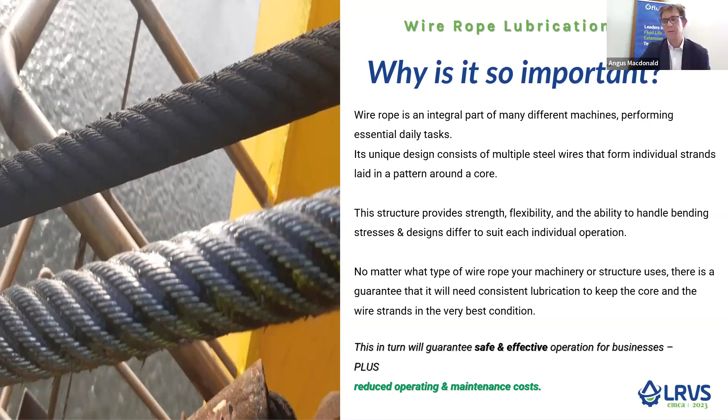So why should we be looking at lubricating wire rope? Well, compared to presentations on big key applications like turbines, compressors, hydraulic systems, that kind of thing - lubrication can raise wire rope lifetimes by up to 300%, improve safety for operators, and really importantly, increase the availability of equipment, so we're reducing downtime.

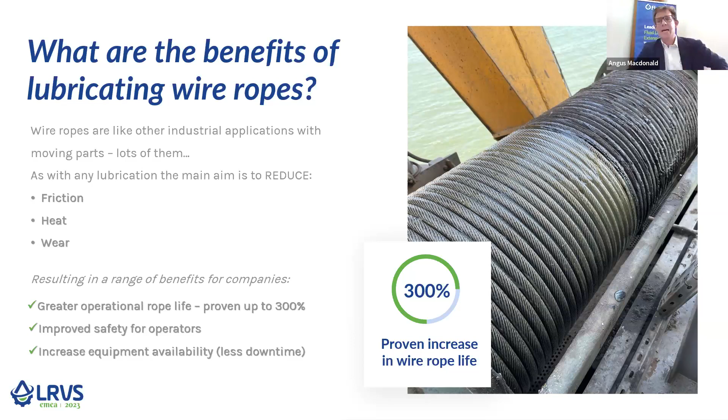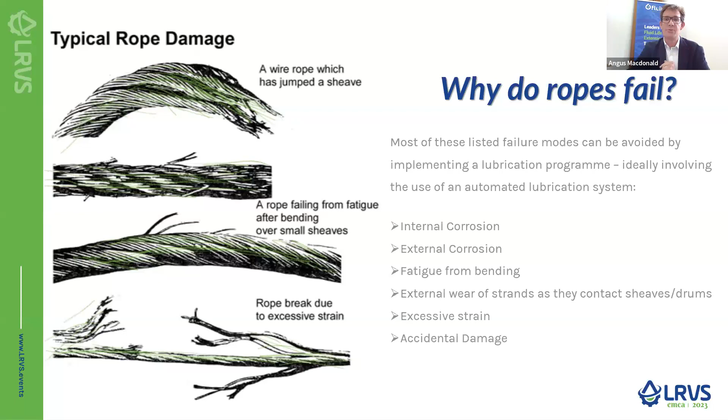So why do ropes fail in the field? There's a list of these failure modes. Most of these, not all, can be avoided by implementing a lubrication program, ideally involving the use of an automated lubrication system. These include internal corrosion - it's incredible how much moisture and water makes its way inside ropes. External corrosion, obviously a lot of the rope is exposed to general weather conditions. Fatigue from bending. There's also external wear of strands as they contact sheaves and drums on the particular application. Excessive strain, and unfortunately there's also accidental damage, which can't always be controlled, and that depends on the industry. But most of these failure modes can be controlled or significantly reduced by quality lubrication.

So some lubrication is understandably better than none at all. When I visit customers around the world, it still amazes me how many companies aren't actually implementing any sort of lubrication on their wire ropes. However, the majority, I'd say, are still manually lubricating ropes in multiple industries, and there are a few issues with that. Firstly, it's extremely labor intensive. It's a slow process. It will mean there's increased expensive equipment downtime because those ropes can't be working normally, so that's an added high cost.

It's numerous workers being involved in a relatively non-value adding activity. Importantly, it's extremely messy. You can imagine, we've got a couple of examples there, particularly on the right-hand side, these huge ropes.

The extra mess leads to equipment downtime because cleaning is needed for the surrounding area. There's a lot of wastage of lubricant. A lot of the lubricant doesn't actually make its way onto the rope, but onto the floor, into the general environment. And it tends to also involve an excessive use of rags, gloves, overalls, that kind of thing.

Unfortunately, manual lubrication tends to be fairly ineffective. As you can see from the picture on the right-hand side, when a lubricant's being applied by gloves, brushes, or maybe a spray, you're typically only going to be coating the outside rope strands. So the core of the rope will not be receiving any lubrication. You're not going to be getting any real penetration, particularly if you're just slapping grease on the outside of that rope. Hence, corrosion and wear is then possible.

Also, there's no water displacement from the rope internals, so the water will remain in there. And as I've just mentioned, that internal corrosion is going to build up, which can lead to rope failure fairly rapidly.

Inconsistent application will lead to ineffective lubrication. So yes, the lubrication, some is better than none at all, but I hope you can see here that the manual side of things isn't that effective.

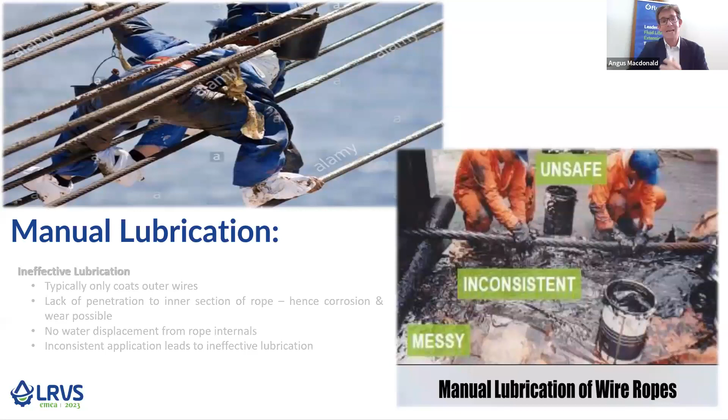And finally, with this business, if they're handling rope, workers will be coming into contact with it while wearing gloves or whatever. It's not a safe environment. Very often, as you've seen from some of the previous application photos, they're generally working at heights to do the lubrication, which again leads to dangers.

And I've already mentioned there can be environmental contamination with excess lube dripping off the ropes, entering maybe waterways or sensitive areas. And again, it's a slow process. It means the equipment's not working, which means you've got downtime, adding to the costs for the client. And I've mentioned already that there's numerous workers being utilized on a non-value added activity.

I was with a port facility in the UK a few weeks ago, and they said they still manually lubricate the wire ropes. They've got a fleet of 80 straddle carriers, and the maintenance team said to make sure they're completely clean before they can be used again, and that takes hours and hours. So it just shows that even in a very modern port facility, there's still a lot of manual lubrication being used.

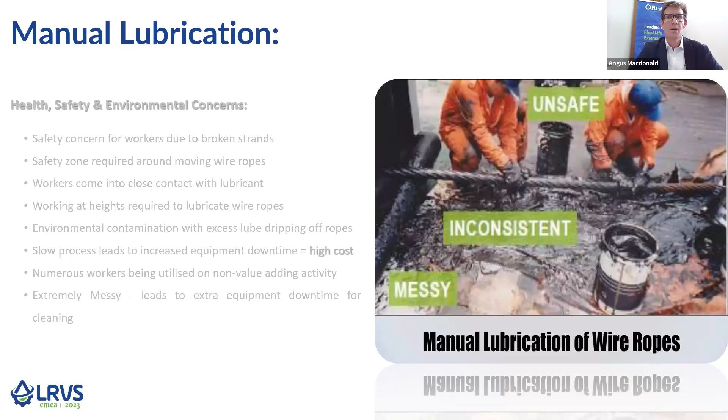In that case, what is the alternative? What these days should be the best practice solution for lubricating wire ropes?

As well as just lubricating ropes now, it's also involving the cleaning of ropes - the removal of contaminants prior to the actual lubrication of the ropes, ensuring an even more effective penetration into the rope.

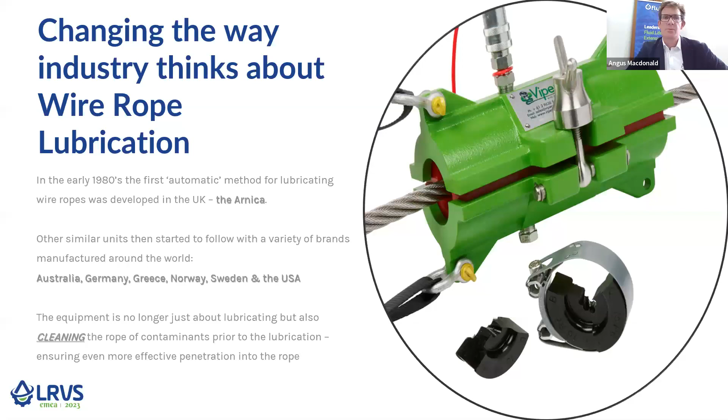So when clients choose an automatic wire rope lubrication system, why are they doing it? Well, number one, they're generally interested in increasing the life of their wire rope. I've already mentioned that it's been proven over the years that with really quality lubrication, you can save by up to 300%, and that's mainly down to superior corrosion and wear protection.

I've talked a lot about how timely manual lubrication is and how much time that takes. With an automatic lubrication system, it's been proven over the last few years that the amount of labor required for lubrication when using a unit can be reduced by up to 90%.

A number of the units on the market these days can achieve lubrication speeds of up to 2,000 meters an hour. And I've also mentioned downtime a couple of times already - with that kind of reduction in lubrication time, we can really have a significant reduction in expensive downtime, meaning that critical applications such as cranes can keep on working for much longer periods of time.

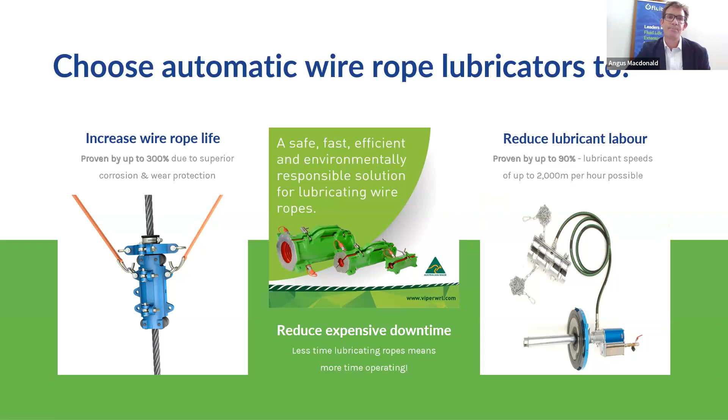So how do the wire rope lubricators actually work? They are all, as you've seen in some of those earlier photos, fairly similar in design.

The collar clamps onto the rope. Inside the collar, we have a pair of seals generally, which are designed specifically for wire rope diameters. This collar is then filled with the lubricant, which tends to be a grease, applied from a grease pump.

Inside the collar, as I mentioned, the seals are specific to particular rope diameters. The rope is pulled through the collar, and depending on the design of the seal, very often they're working to hydraulically work the grease into the rope. These kind of units are often called pressure lubricators, which is really not accurate, because when you're dealing with a rope it's not a solid structure and you can't completely seal that collar, so it's not really under pressure, but you're filling that collar.

With that specific example, with the design of the seal, as the rope travels through that collar, the seals actually hydraulically massage the grease inside that rope.

Thirdly, and more so probably in the last 5-6 years, wire rope cleaners have been developed. Again, these are very much designed specifically depending on the lay of the rope, right-hand lay or left-hand lay, and the number of strands—so you'll either have a 6-strand rope, 8-strand, or a multi-strand or armored rope.

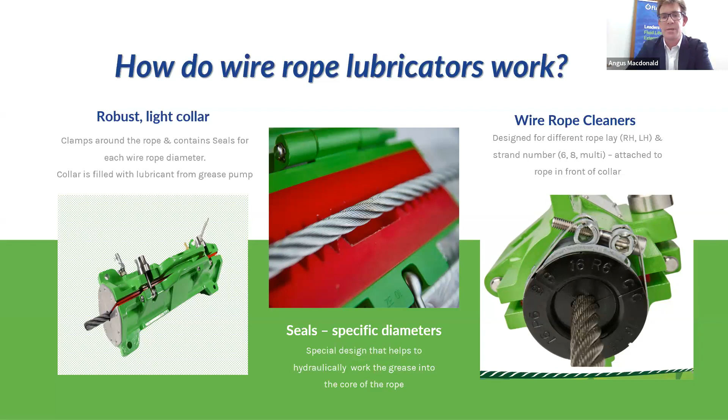I've just got a very quick video because it's easier to explain by a short video. This is actually taken from a coal loader in Indonesia, I think 5 or 6 years ago. We posted this on our LinkedIn profile earlier this year.

And the reason I've included some of these figures is just to show how interested people are in this kind of application. So, nearly 75,000 views of this particular video, over 4,000 engagements, nearly 2,000 likes, a lot of reposts, etc. So it's still incredible how many people and companies do not know that this type of lubrication method exists.

So we'll just have a quick look at this particular unit. There, the front of the collar—that's the wire rope cleaner removing a lot of the excess old lubricant from the rope. And out the other side of the collar, you can then see a really well lubricated, consistent level of lubrication on the rope.

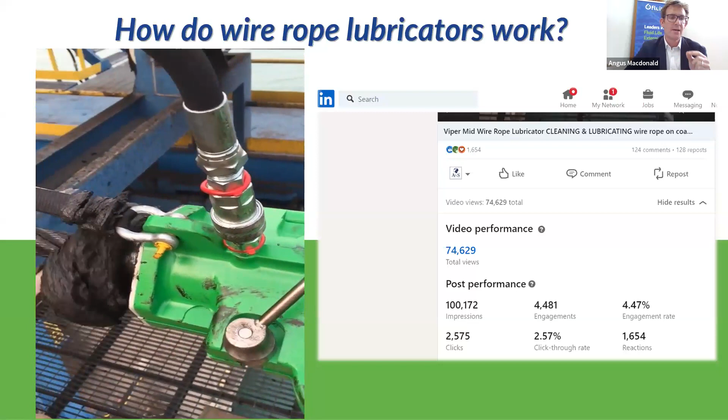You can see there's no spillage of grease from the collar—it's all going on the rope, so there's no lubricant being wasted. And in front of the collar, importantly, all the old contamination is being removed and collected, so that you're getting a really nice, clean rope going into the collar to be fitted.

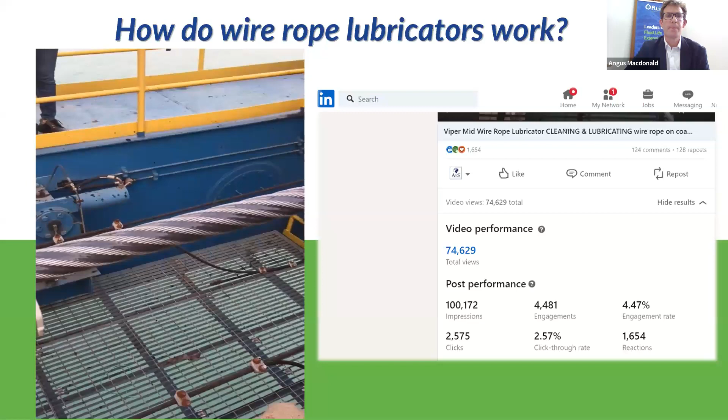So moving on again in terms of how the wire rope lubricators work, I've mentioned generally you're applying a grease, and they can vary from NLGI 00 up to maybe a non-tacky NLGI 2. A lot of customers around the world are using a 0 or 1.

A range of greases have been proven to be effectively applied using lubricators, and the choice will depend on LETs—so the load, environment, temperature, speed—and obviously the type of application. So that particular image is a 00 grease being used on a mobile crane in a mining facility. This is a number 1 lithium tacky grease being used on a winch in a shipyard.

And then finally, it is possible to apply oils. It's not quite as easy as using a grease, but that can sometimes be required depending on the application. So this is a mining winder in Canada, and depending on the type of application, sometimes an oil is required.

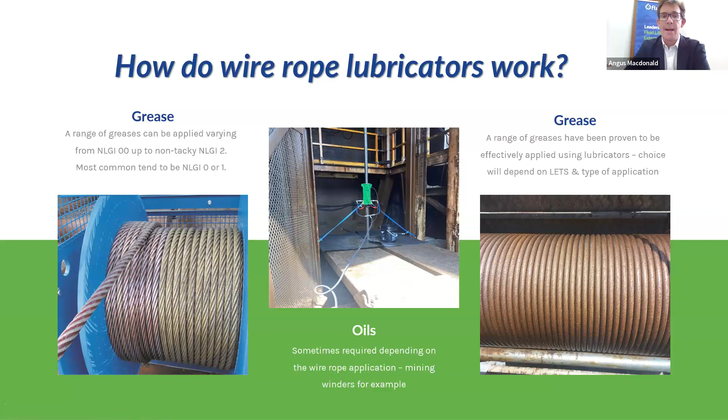So how do the wire rope greases actually work? Well, they have 3 main lubricating properties. As with any lubricant, the first layer—you've got a hydrodynamic full film lubrication with the oil film. But once you get any sort of higher temperature, or with the wire rope, normally heavier loads, this protective film will often become very thin and can rupture.

You then tend to have a second layer of protection, which tends to be extreme pressure additives. This is activated by the heat of friction from the metal-to-metal contact when that oil film's been ruptured. And then they react to the metal surface and form a protective chemical film.

And often, but not always, there's a third layer—maybe a solid lubricant suspended in the grease oil. So when that oil film ruptures and the EP additives are no longer protecting, these solid lubricant additives can then also physically separate those metal surfaces. They could be well-known additives like Teflon, Moly, or unique ones like Almasol.

There are many types and brands of greases used in wire rope lubricators around the world. This is just a snapshot, but as you can see, the majority of the major lubricant companies are included. I think something of big interest is the number of products that are VGP compliant, which is the Vessel General Permit from the US, requiring an environmentally acceptable lubricant, generally for maritime applications.

I mentioned our role with sustainability earlier in the presentation. We're finding more and more clients are also interested in using an EAL type grease for their ropes, in case that product drops off the rope and enters waterways or sensitive environmental areas. There's a very wide range of brands and types of grease that can be applied through these types of lubricators.

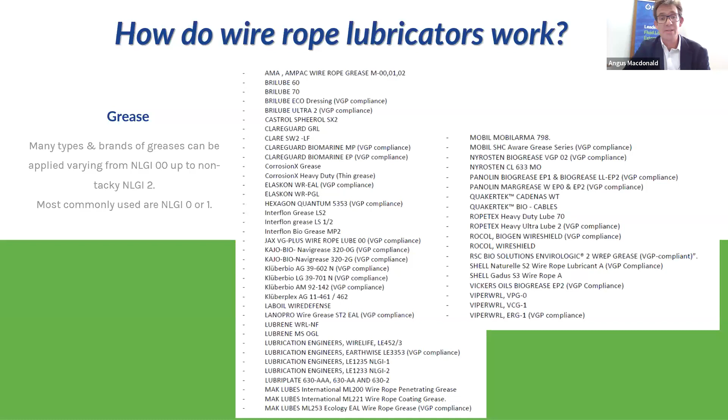The lubricators can be used in a variety of applications, but in terms of location, we often get asked this: it needs to be where the wire rope can be moved past a fixed point, and where the lubricating unit can be safely anchored.

More recently, probably the last three or four years, it has also become possible to clean and lubricate stationary ropes. That is done by, instead of pulling the rope through the collar, pulling the collar along the rope using a pulley system.

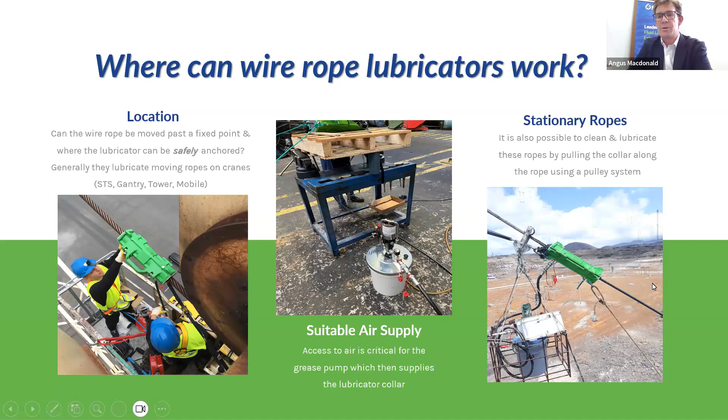This particular image is on Ascension Island - I'll talk about it shortly. These are guy ropes from very high communication towers. Very simply, this collar is linked up to a capstan, and they're successfully pulling the collar up the rope. They're like 100-meter long ropes, and they're able to clean and lubricate these stationary ropes in that way.

What are the results? Several, and they're all positive. Wire rope penetration - I mentioned before the ability of the seals to hydraulically almost rub the grease into the rope. We generally achieve a really successful level of grease penetration to the core of most wire rope diameters, ensuring individual strands receive the protective grease.

I think the largest diameter I've been involved lubricating was 110 millimeters on a large offshore crane. They were very pleased with how well the lubricator did the job, but you're going to struggle to get penetration into a 110 millimeter wire rope.

Importantly, you achieve a consistent level of application of the lubricant, so it's going to receive the correct amount of grease. Depending on the type of rope, the grease is going to be penetrating the core, filling the valleys, and also having a protective film over all the outside wire strands.

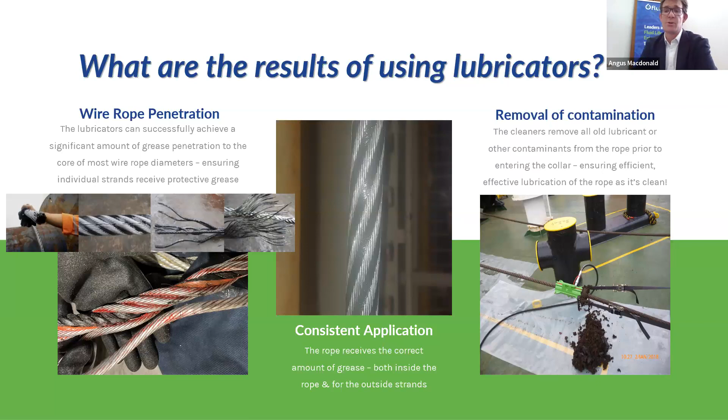Okay, so what are the results of correctly lubricating ropes? I've got four quick case studies here to run through.

The first one involves a ship loader at a coal terminal in Australia. When they previously were manually lubricating the ship loader, it was taking two people two days every two months. It was a really dangerous job. They were suspended from the rope in a basket in really messy conditions, and they were concerned with the amount of grease and lubricant dropping from the rope into the environment, whether the ocean or the port side. Once they introduced the use of a wire rope lubricator, it was then taking only one person two hours every seven months. So you can see immediately the significant reduction in downtime there.

Importantly as well for the client, it was a lot safer for the workers. They were no longer needing to be suspended in the basket, and they were not getting any environmental contamination. And finally, they've seen a significant increase in the life of those important wire ropes.

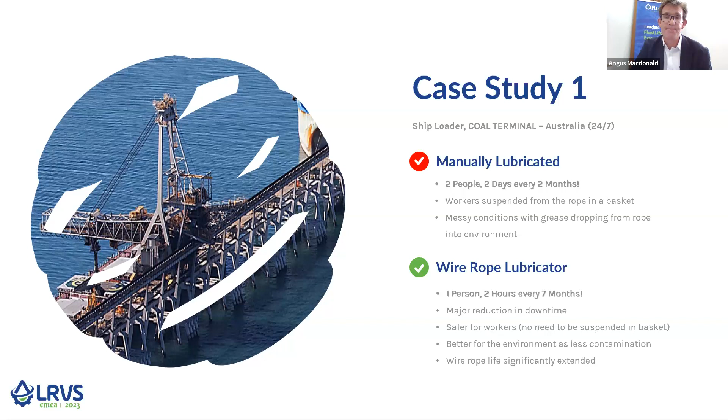Secondly, this involves the UK's largest crane at one of our nuclear power plant construction sites. When the team previously had to manually lubricate, it took three people three weeks - an unbelievable amount of work. They were brushing the grease onto the ropes. It was really messy and again very dangerous.

Once they implemented the use of a wire rope lubricator, it was then taking only two people, only two days. So again, a huge reduction in downtime, and again much safer for those workers and much better for the environment. And again, we saw good wire rope life extension.

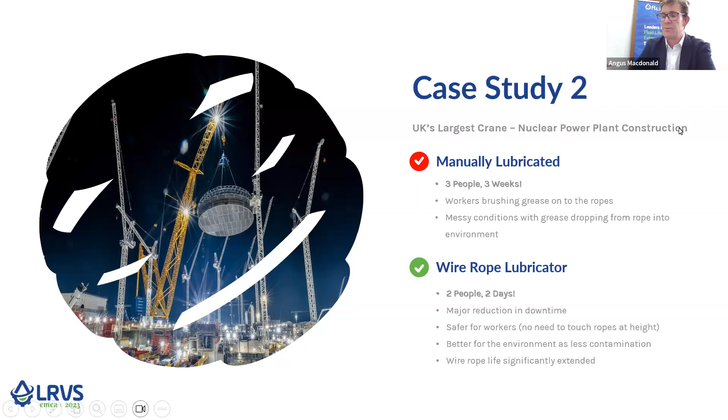The next case study - I mentioned it already - but Ascension Island has 16 very high communication towers. Each of those has 16 guy ropes, some of them up to 100 meters in length. It was generally taking a team of four people several weeks. I don't have the exact figures, but again the workers were having to brush the grease onto the ropes from a basket hanging below the rope, up to 100 meters in the air. It wasn't a popular job, took a long time, and was obviously potentially very dangerous.

Plus, with the island environment, they were very concerned with contamination issues. We now know it's only going to take two people. We're not sure of the total number of days, as they've not completed all the jobs yet, but they've been over the moon with how much easier it's made their lives. They've set up this unit - the lubricator is towed by a capstan winch up and down the ropes. They're even able to clean the rope. They've seen a fantastic job with the amount of contamination removed, and it's meaning they're getting a really good protective layer of grease on these ropes, because there's a lot of environmental exposure there, so they were having big problems previously with corrosion.

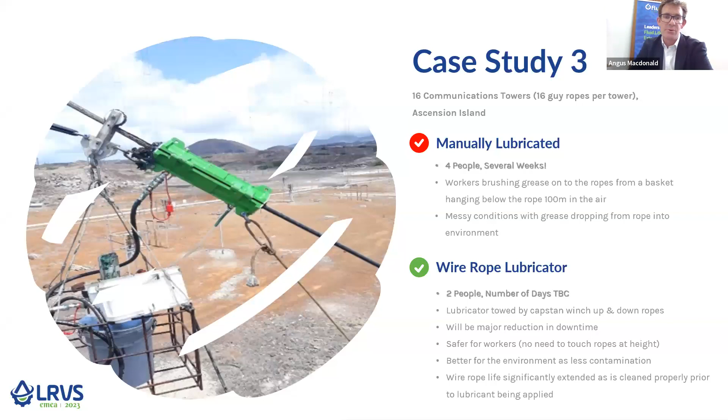And then the final one, from India, a dredging operator. This was probably six to seven years ago, when they were manually lubricating the ropes. These ropes were being replaced every 12 months, costing over $20,000. It was generally taking at least 24 hours to replace those ropes at a cost of $15,000 in downtime.

Once they started using a wire rope lubricator and correctly lubricating those ropes, they were able to increase the rope life by about six months. It reduced the cost of replacement by up to 30%. So they were looking at, within 18 months, just on this one application, nearly $11,000 worth of savings, and once again better for the environment. And those savings weren't even including the reduced lube labor or the reduced labor to change the ropes.

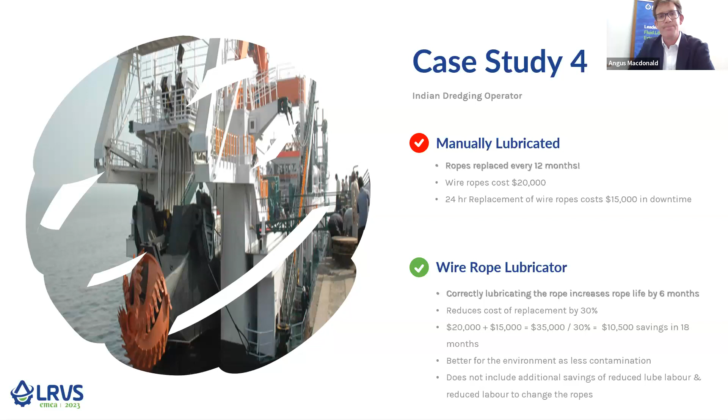So just a few final examples in terms of the key clients using rope lubricators around the world: ship-to-shore cranes, gantry, mobile tower cranes. I mentioned mining winders, and we've had good success with bulk carrier vessels and mooring ropes on ships. A lot of the Greek shipping fleet are using these products now. Also offshore ROV cables, including some of the really large ones.

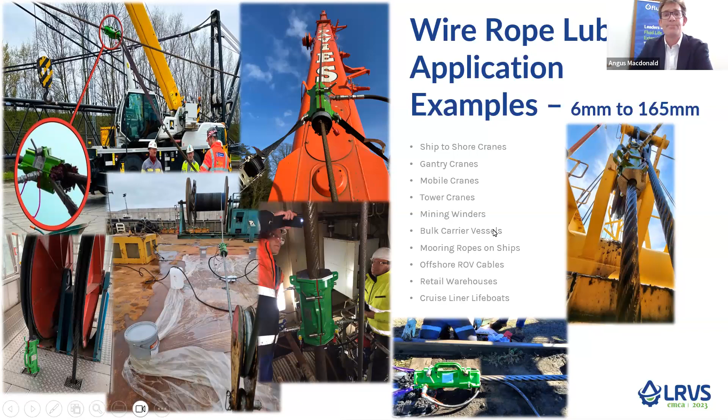So just to summarize why it's so important to have quality lubrication of these ropes: we've proven it reduces lubricant labor by up to 90%, reduces the environmental impact by minimizing grease contamination, improves the safety of maintenance personnel, and from a sustainability perspective, increases the life of ropes by up to 300%.

So in summary, we're guaranteeing customers safe and effective operations, while reducing their operating and maintenance costs and reducing the environmental impact.

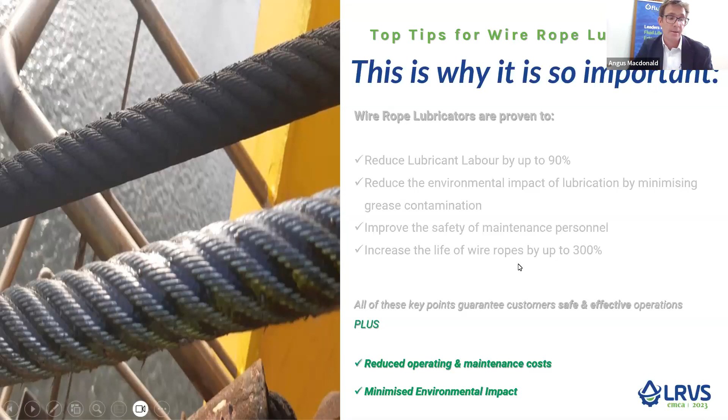Oh, thank you, Angus. Great presentation. We don't have any questions at the moment, just positive comments that it was a very interesting presentation. Great presentation as well from Bruno Kexa. We'll let you know if we get any questions coming in. Guys, you have 2 more minutes, so if you want to ask questions, it's now.

Okay, well thanks guys, I appreciate the positive feedback. I've got a couple of questions here.

Luca asks, what are these ropes used for, cranes? So yeah, Luca, a lot of the ropes are used in cranes, but as I say, also mining winders. The main application we're targeting though is cranes.